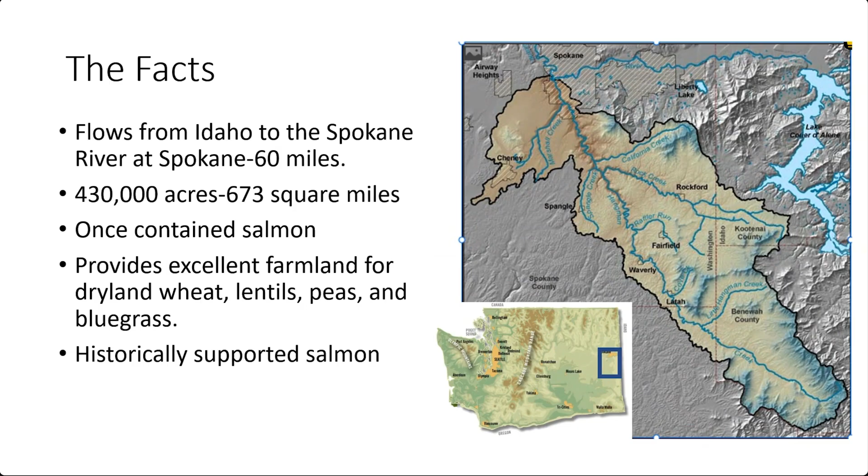You'll see this map again, I think, in another presentation. One big thing about the creek is its geology, and I think this really shapes a lot of what I'm about to talk about, and other presenters are talking about. Here in Spokane, you guys have driven by the Qualchan Golf Course and seen those Qualchan Bluffs, I guess I called them.

That's the really sandy soil that was deposited 10, 15,000 years ago by the Missoula floods. Relatively recent, and it's eroding. You can see this picture. I just canoed Hangman Creek recently and took this photo, and it's still eroding to this day, pretty rapidly.

Downstream of there, but it's to the south because Hangman Creek flows from south to north. And I should note that it ends up here in Spokane. People's Park is the mouth of Hangman Creek, right there near Sandifur Bridge.

So we also have this really cool canyon section, which is 200-foot basalt cliffs. It's about 11 miles long, and it's just unbelievable. It's a relatively untouched environment, and not only is it gorgeous, it's really exciting rafting or whitewater kayaking when the water is up. There's an entire presentation that can be done on the recreation in Hangman Creek, and I think whitewater rafting would be a good one.

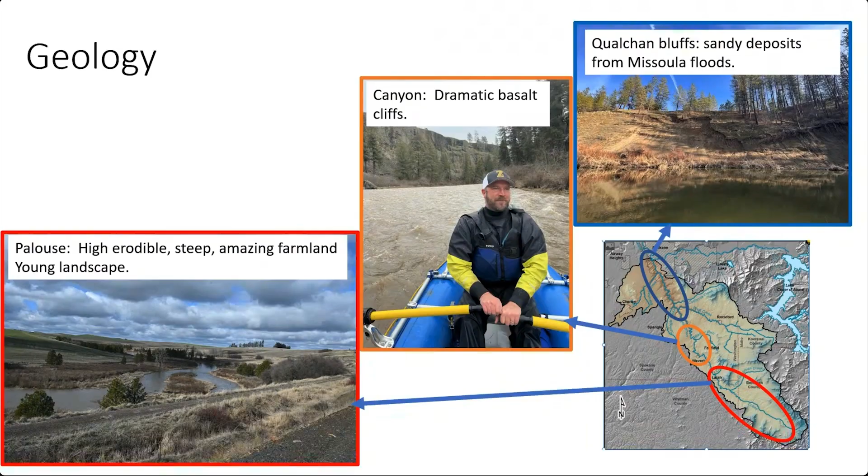And then south of there is the Palouse. It's this amazing farmland, but it's also highly erodible soil. It's relatively young - the Palouse was sort of blown in there by winds when the glaciers receded, and it's really steep because it is young. That highly erodible, very fine soil gets into our creek and is suspended for a long time, and that's what causes a lot of the pollution you'll see.

And a lot of this land use is a big contributor to pollution. Hangman Creek is one of the most polluted creeks in Washington state, if not the most polluted. And it's polluted with sediment, temperature, dissolved oxygen.

These are the kind of non-point source pollutants that aren't going to harm you as much. They're not toxics, but they do make it really hard for fish to live there. It's about meeting our designated uses, which I'll talk about in a minute. But it's just dirty, I think, is the way to think about it, and it's hard for salmon and trout to live in it.

What caused this, along with the geology and that really fine sediment, is what we've done to the creek. It's the straightening of the creek, which you can see in the upper left corner here, and the removal of vegetation along the creek - there's no riparian or streamside vegetation here. We'll talk about that more later in another presentation.

This has caused deeply incised channels, like you can see on the right. There's some riparian vegetation there, but there's no connection to the floodplain. So when that creek gets high, it's still just moving really fast, and that causes more erosion. It's like a positive feedback loop where more erosion causes more erosion, and it causes it to run faster, and more erosion happens.

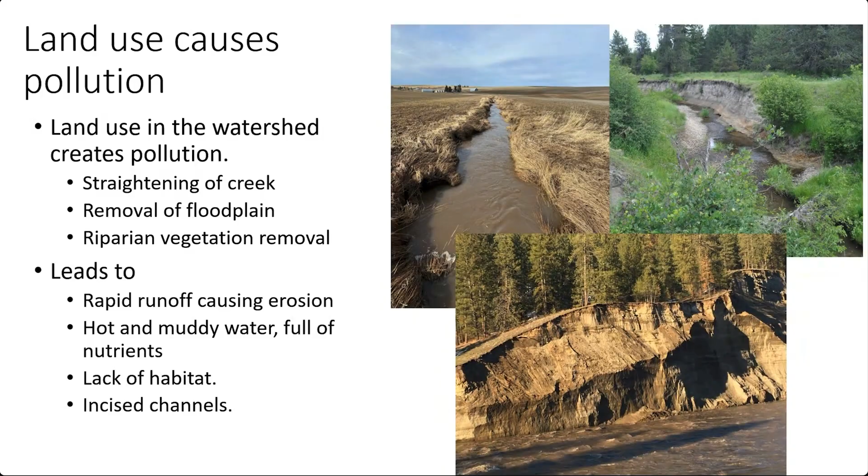The pollution impacts everyone. We call it designated uses - these are the things that legally you are required to protect by the Clean Water Act. This could be a whole other talk by Caitlin about what these are and how we protect them. But really what you need to know is trout and salmon need clear, clean, and cold water, and Hangman Creek does not have that. So it violates that designated use for fish rearing, spawning, and migration.

Sediment buries their food and their nests. Could you imagine fishing on this plume? This is the mouth of Hangman Creek looking downstream, sort of near People's Park. And you can't fish this really for trout, if there are any trout in it - I don't think there are.

So it impacts recreation, and these pollutants could potentially harm humans, especially if there's bacteria in the water. And aesthetics - it's ugly, I guess, is sort of how we view it. No one's told me they like the pretty muddy water of Hangman Creek.

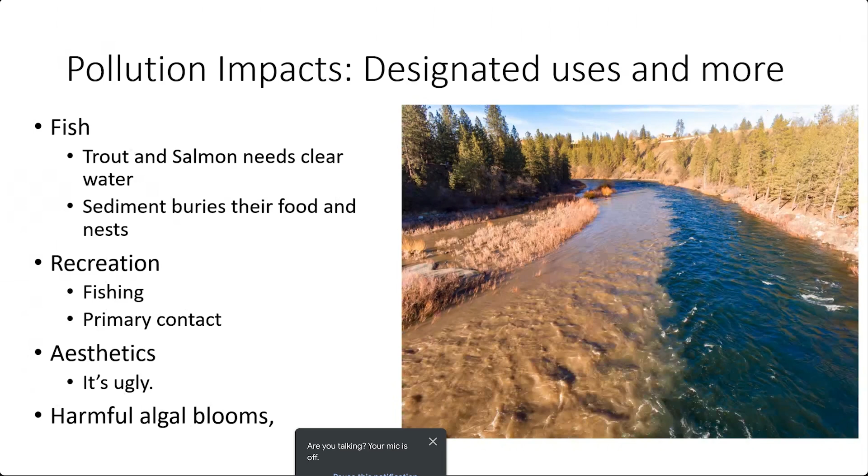But it also impacts other things. All these nutrients can go downstream and impact Long Lake or Lake Spokane, and cause harmful algae blooms or low dissolved oxygen that causes fish kills. So you sort of get this pollution in Hangman Creek, but it also affects the Spokane River and downstream in Lake Spokane.

Salmon were once in Hangman Creek. I did quite a bit of reading to prepare, including quotes from tribal elders. One book said Hangman Creek was muddy back in the 1890s or 1880s and probably didn't support salmon, but tribal elders all mentioned how important salmon were. There were 8 or 9 fishing camps along Hangman Creek, including in the town of Tekoa, and fish were an important part of the culture and food sources of the Coeur d'Alene tribe along the creek.

There currently is a reintroduction program by the Coeur d'Alene and Spokane tribes, but the Coeur d'Alene tribe is leading the one in Hangman Creek. They're releasing big adult fish in the creek and the Spokane River.

One of the locations is the Pilcher property at the South Hill Bluff, and in the headwaters as well. They're also releasing juveniles at 9 Mile Dam, hoping they will one day return to Grand Coulee or Chief Joseph Dam, where there's no fish passage. So they'll out-migrate through the dams, get spilled over, and one day return in 4 to 7 years, and they'll truck them back here to spawn.

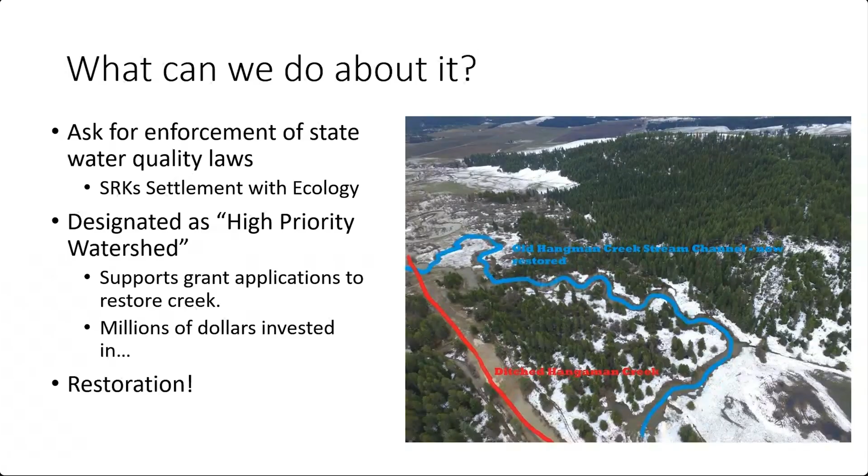So what does that lead to? Well, really it leads to restoration, because you've got to do the work on the ground and get it done. Restoration is really moving beyond just tree plantings, and that's what I want to highlight tonight, and what our speakers are going to highlight: floodplain restoration, shoring up banks that are eroding, and some other cool programs.

This is the Lands Council's Beaver Dam analog work. They're not speaking tonight, but I thought I'd highlight it because it's a really low cost way of restoring a floodplain. Hopefully we'll get them on soon to talk about their work in the basin.

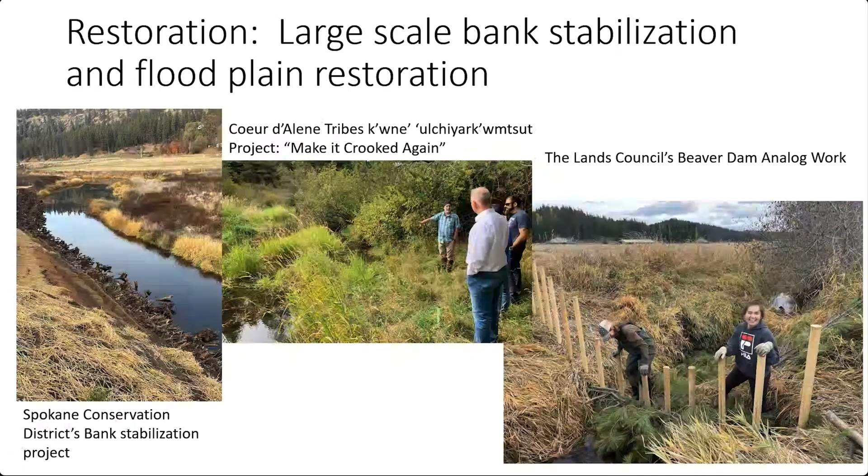The Coeur d'Alene tribe couldn't be here either, but they have a really neat project in the headwaters, translated as 'Make It Crooked Again.' They've taken an incised channel, filled it in, and let the floodplain restore itself, doing a lot of work along the way. And on the left is Dan's project, he'll talk about that in a little bit.

Tonight we're going to highlight two speakers. I wish I could get everybody to talk, but we only have so much time. We have Dan Ross of the Spokane Conservation District and Jim Tuck with Trout Unlimited.

Let me pull up Dan's bio. He's going to talk next, but he's a longtime employee of the Spokane Conservation District, 26 years, since 2000. He has 26 years of field experience working with SCD and is getting a lot of work done on the ground, which you'll probably get from his presentation. It's not just limited to Hangman Creek or restoration, but also fish barrier correction projects like culverts, and work in the Little Spokane River. So I think Dan is up next.

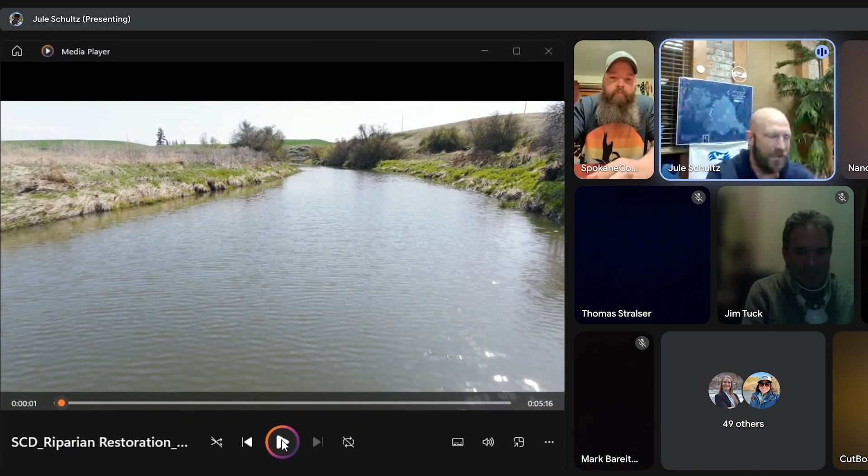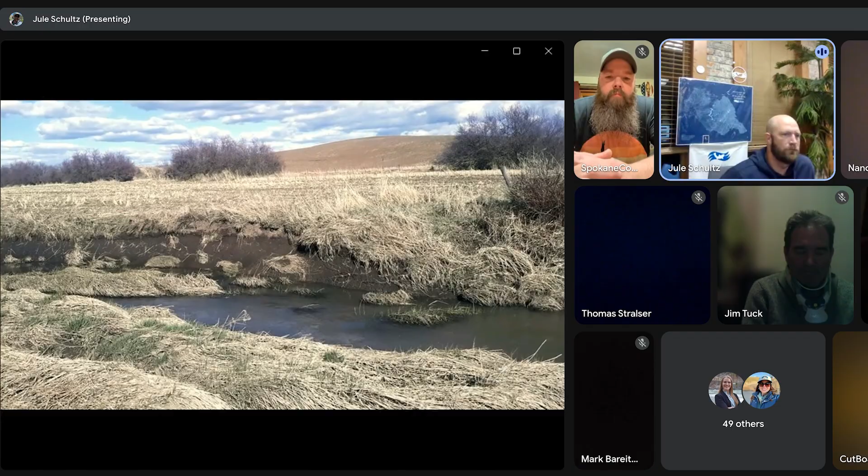Hangman Creek and its tributary, Little Hangman Creek, flow from Idaho's mountains to the Spokane River, supporting people, farms, and fish. Over the years, runoff, erosion, and the loss of streamside plants have raised water temperatures and harmed fish, while erosion has carved away valuable farmland. Today, partners see a future where healthy water and farmland go hand in hand. Landowners are working with Spokane Conservation District to voluntarily restore the creeks while keeping local farms thriving.

The history of Hangman Creek is such that it's been manipulated since the early 1900s. There's been a lot of manipulation of the channel, and when you do that to a stream, you're basically interrupting a geomorphic process that allows a stream to manage its own energy. When you straighten out a channel, it can't manage its own energy any longer, so it carries those velocities downstream, and those get exacerbated and start tearing banks apart. We've seen that all up and down the system.

As long as I can remember, this creek has been an issue of breaking out of its channel and making new channels, running and just making a mess of things.

In 2023, the Spokane Conservation District partnered with the Washington State Department of Ecology to launch the Hangman Creek Riparian Restoration and Conservation Program, providing financial incentives and hands-on support to help farmers voluntarily complete projects that improve water quality and protect creek banks. Partnering with generational grower John Heaton, they reshaped the once straightened Little Hangman Creek into natural bends to slow water and reduce erosion. They also planted hundreds of trees to stabilize the banks.

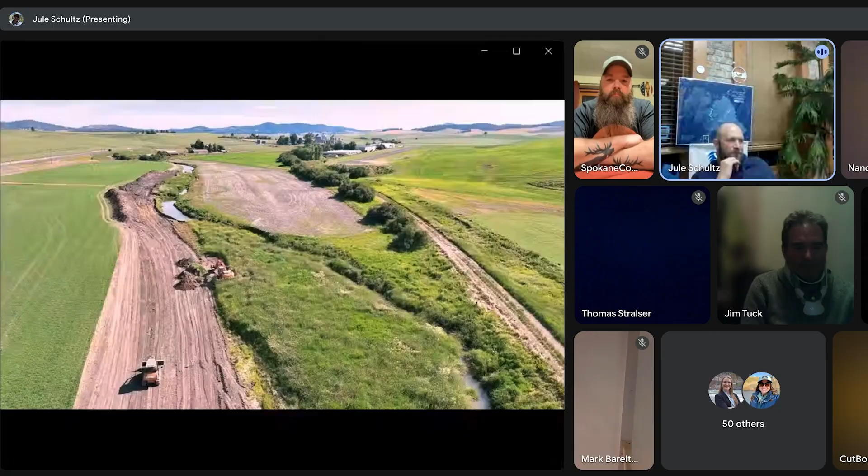Successes like this show how collaboration can help farmers navigate tough situations and regulations with limited resources. That's where the Conservation District comes in, serving as a bridge to connect farmers to the tools, funding, and expertise they need to solve complex problems.

I really view myself as an advocate for farmers. A lot of times they're saddled with regulatory authorities that come out and tell them they have to farm a different way or a certain way, and they don't have the resources or the knowledge or the ability to do that. That's where I see the Conservation District coming in as a partner with farmers, to give them the technical assistance and the resources to do the restoration work, and then also beat the bushes and find financial incentives that don't undercut their bottom line.

We're changing the creek banks here, which I think is important. We've had conservation programs for years way off to the sides, but not right on the main stem, and so I'm very excited about that. My neighbors at first were not real on board with it, a little bit. They're worried about regulations and stuff, but I have all the way on both sides of me now, guys have signed up. It's a very attractive program, and I think the right times are coming.

Trying to get these things done with limited resources, but we have the budget to do it. We have a plan. It's that old adage, how do you eat an elephant? And that's really what we're doing here, taking off bites where we can. You go walk around out here and you see that buffer width, and the grass is coming out competing with the weed species.

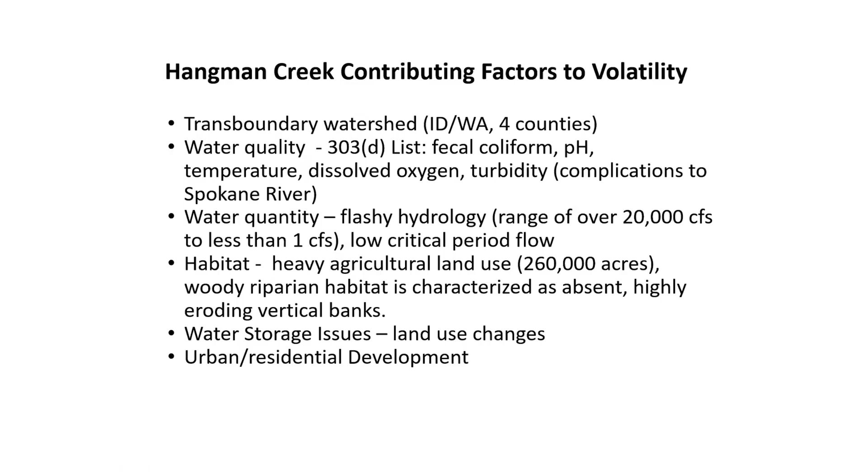Jule already gave a bunch of really good background information on Hangman Creek, so I'll probably skip through a few of these first slides, just breeze over them. I do have a lot of slides, and there are actually a lot of projects to highlight, and I don't want to skip over those too fast. But this is background information Jule already kind of shared. There are land use impacts, and primarily the work I've been involved in is stabilizing the vertical eroding banks. We do have an ag production department at the Spokane Conservation District, and they offer programs that promote conservation tillage and other agricultural practices that benefit and improve water quality. I'm not going to dig too deep into that right now. I'm mainly just going to be talking about the projects we've been involved in.

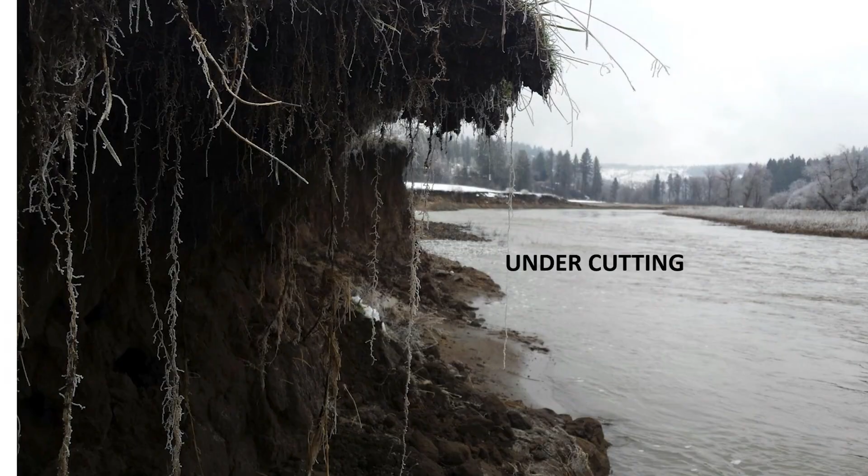One of the major causes of bank erosion in Hangman Creek, from what I've observed over 26 years, is not necessarily the large 100-year flood events. It's the moderate flood events where there's ice rafting associated. When that occurs, you've got ice rafting at a moderate flow event, and what that's doing is scouring and undercutting these banks, and then they start to collapse on themselves, and then of course rinse, repeat.

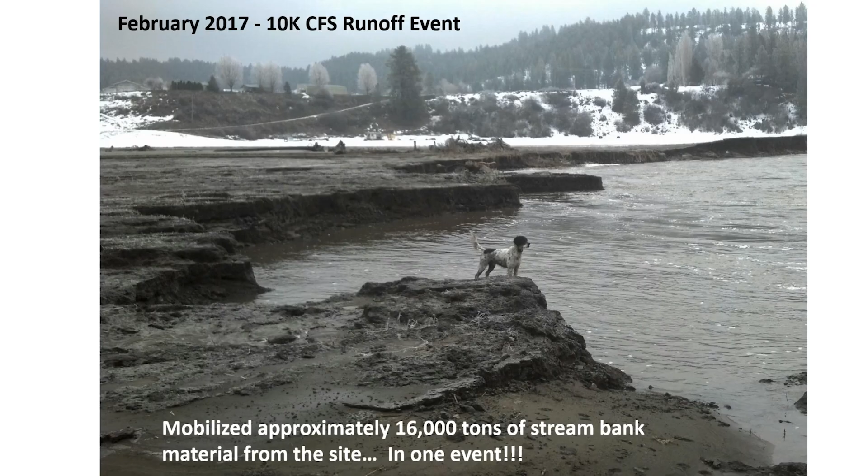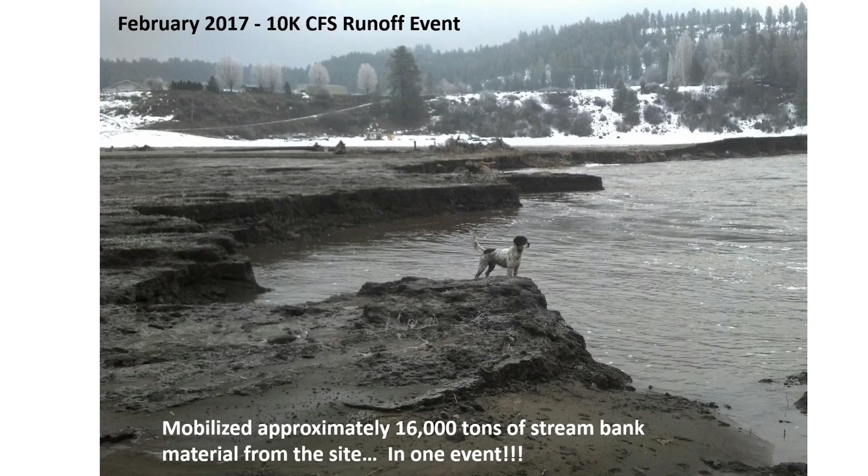This is an area in the River Mile 17 reach, which we started working in 2017 with some design work, actually beginning in 2016. Then in February of 2017, we had a 10,000 CFS runoff event with a lot of ice associated with it. I immediately, right after that event, called the design engineer because we had pre-project survey work in place, and we were able to quantify approximately 16,000 tons of stream bank material came from just this site alone in that one event.

Everybody's probably seen this picture, and Jule, you probably had this one in your slide too, just from a different angle. I was trying to mix it up, yeah. No, that's great. But this is what happens, and this is a combination of agricultural inputs and bank erosion.

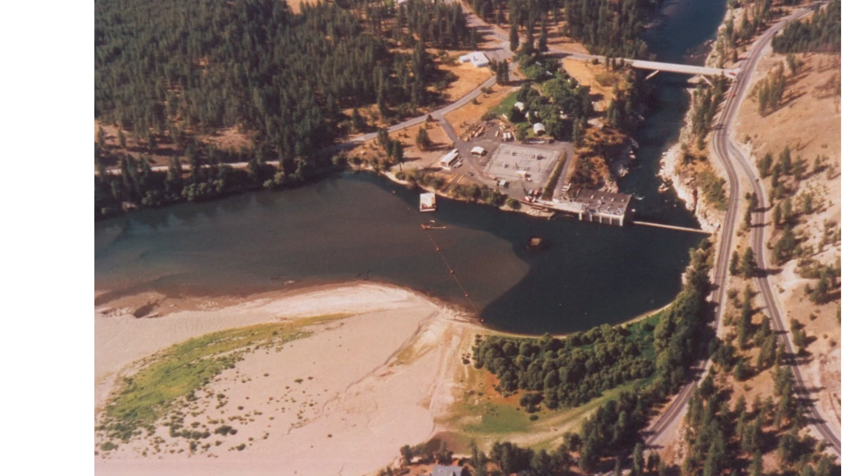A lot of that material ends up down behind 9 Mile Dam. This is a picture of that deposition and where all that's ending up.

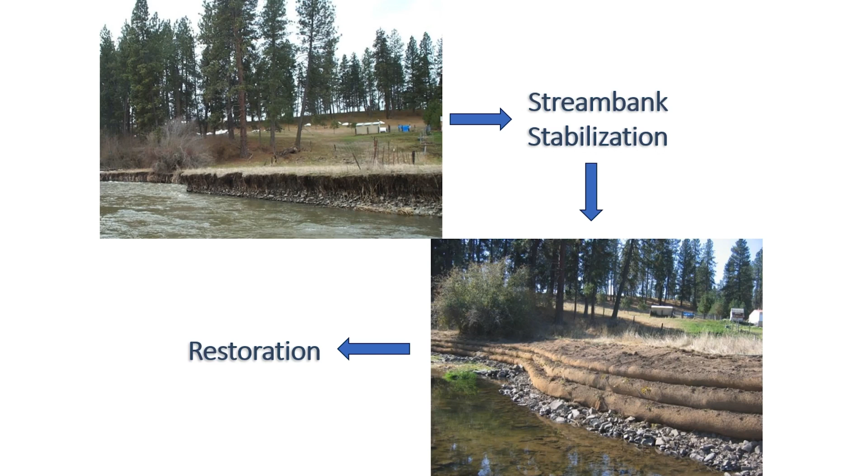When you have an undercut or actively eroding stream bank, you can't just go plant trees into it because it's not stable. They're just going to disappear on you, and they don't have any opportunity to get established. So you have to have that stabilization component before you do the restoration. I'll be talking about the methods we've been using for stabilization in Hangman Creek as we go along here.

Just to give you an idea on the process and timeline it takes to implement a project - of course projects are scaled differently and are site specific, but generally it can take up to 2.5 years from planning to implementation. Then after you do the dirt work, you've got a couple more years of repeatedly addressing and planting and getting plants established and doing weed control and things like that. So to get to a stable condition, it can be about a 3 to 5 year process.

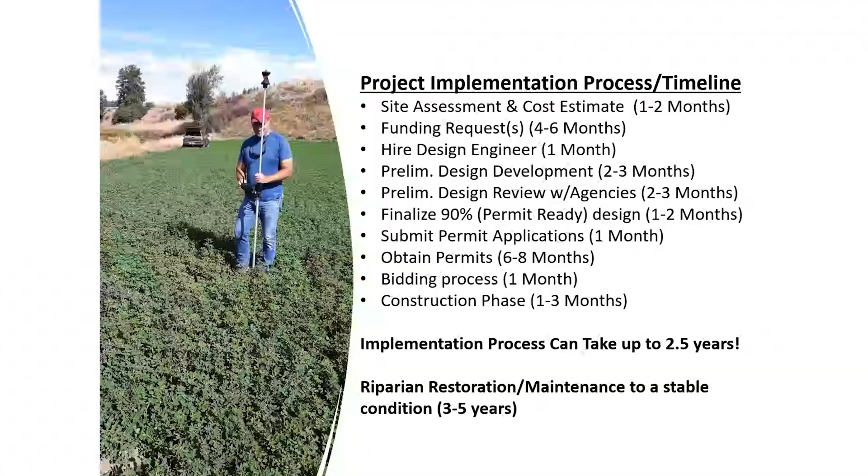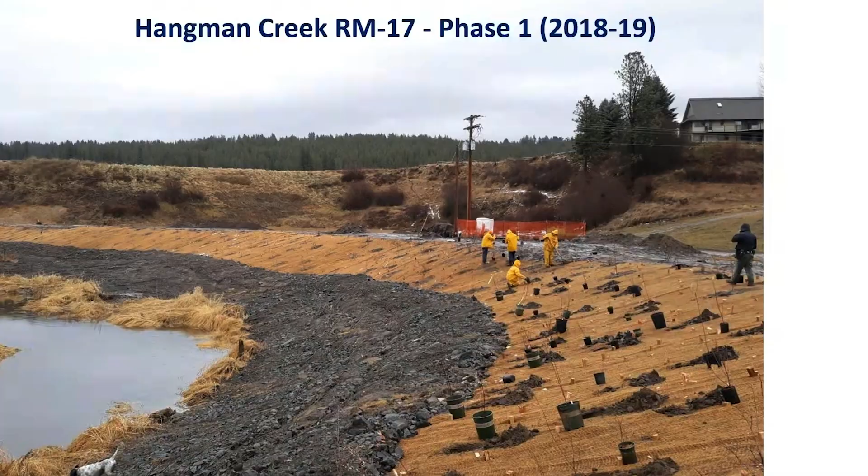This is that same site you saw a picture of with the erosion and the 10,000 CFS flood event. This is Hangman Creek River Mile 17 Phase 1, which we started in 2018 and it went through 2019. This was a vertical eroding bank, and the treatment method here was to re-slope the bank and do rock toe protection. That re-sloping gave us basically a planting medium, and you can see here there's a prison crew out there actually planting trees on that newly re-sloped bank. We also treated that bank with coconut erosion fabric.

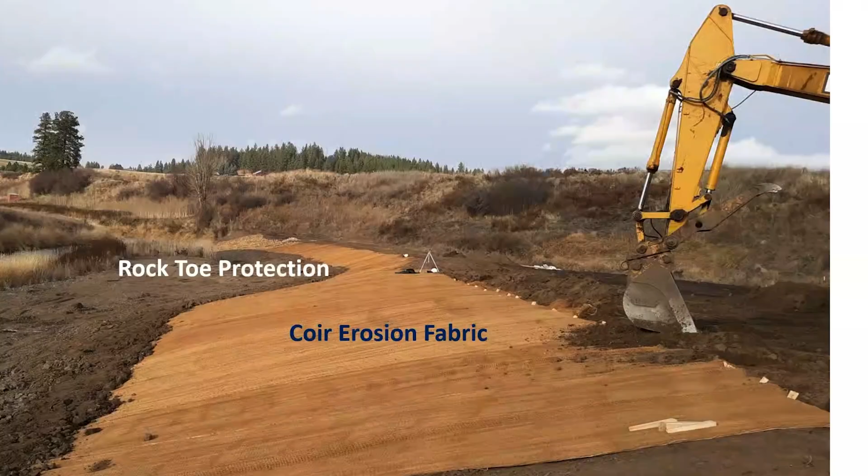This is another closer example of that process. The rock toe protection and the coir erosion fabric are keyed in at the bottom and top of the slope, and then it gets a grid of wedge stakes inserted onto that fabric.

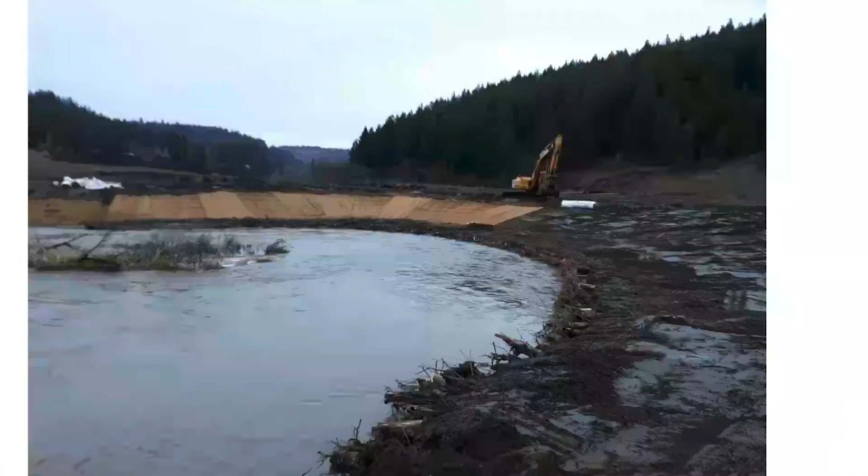This is a view from the other end of that woody revetment bank. Once the wood was in place, we set coconut erosion fabric and then went ahead and did the restoration planting.

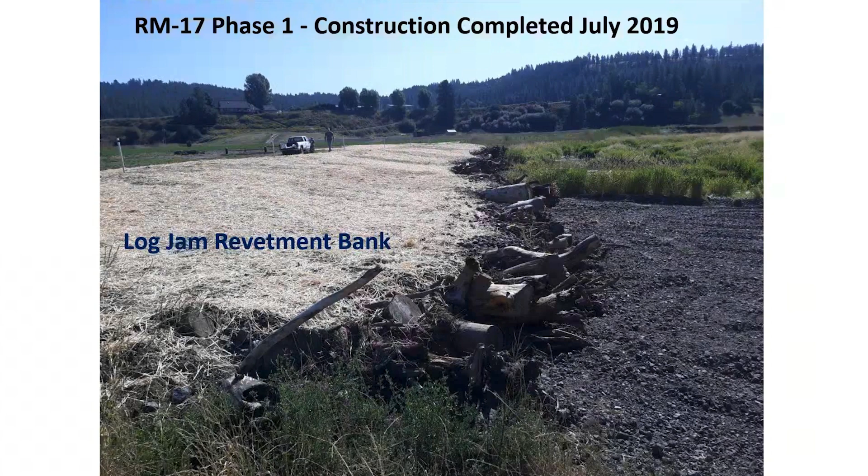The construction in River Mile 17 Phase 1 was completed in July of 2019. This particular bank was treated with a log jam revetment, a lot of wood at the toe just to prevent that undercutting action. This was a combination of 2 landowners for Phase 1.

A couple of years later, some neighbors just downstream of River Mile 17 Phase 1 - immediately after we did Phase 1, they contacted us and said they were interested in doing something as well. So we started the process in 2019, then the planning and design process, and began construction in 2022.

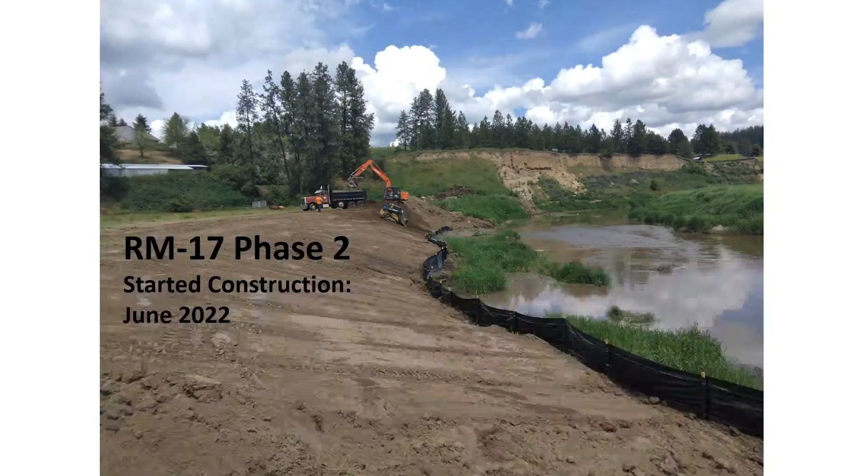This particular site had two different landowners and three stream bank sections with various treatment methods. Right here you're looking at basically a large woody debris toe with a composite of rock and woody debris, with vegetation planted in during the construction process. Then when we were all done, we went in and planted more native trees and shrubs.

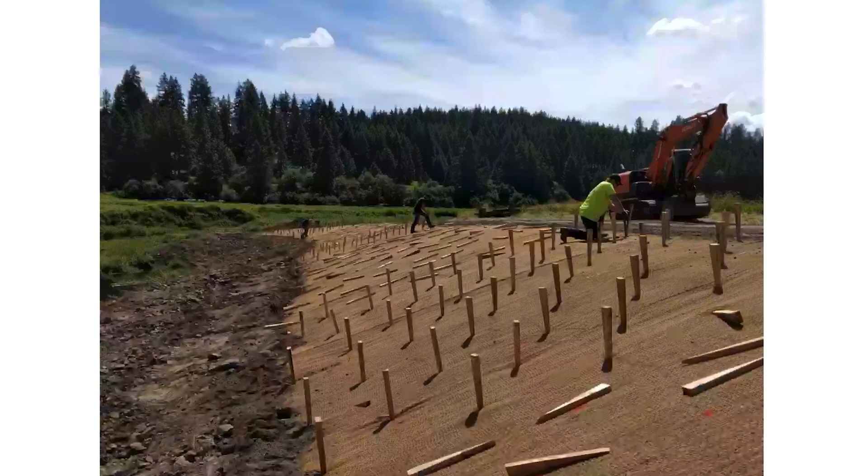This is an example of that wedge stake gridding method I was talking about earlier on a reslope bank with a rock toe and coconut erosion fabric. Pounding those stakes is really labor intensive and takes a lot of effort.

So Dan, you probably got like about 5 more minutes.

All right, we're going to cruise fast because I want to get to the last projects we did at the end of the season. Go ahead and cruise on through here.

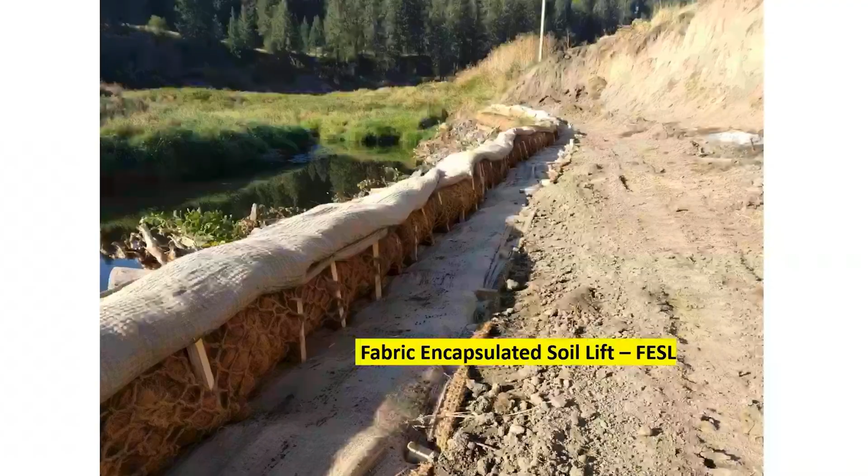That's a fabric encapsulated soil lift. That's a different method too. So this is...

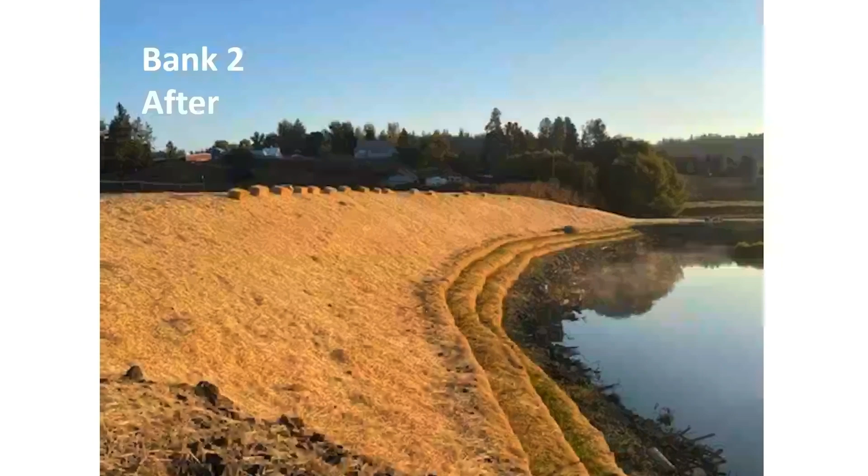Wow, I'll go back to that - before and after. Just keep cruising through these if you want, but they are a really stark contrast. Neat.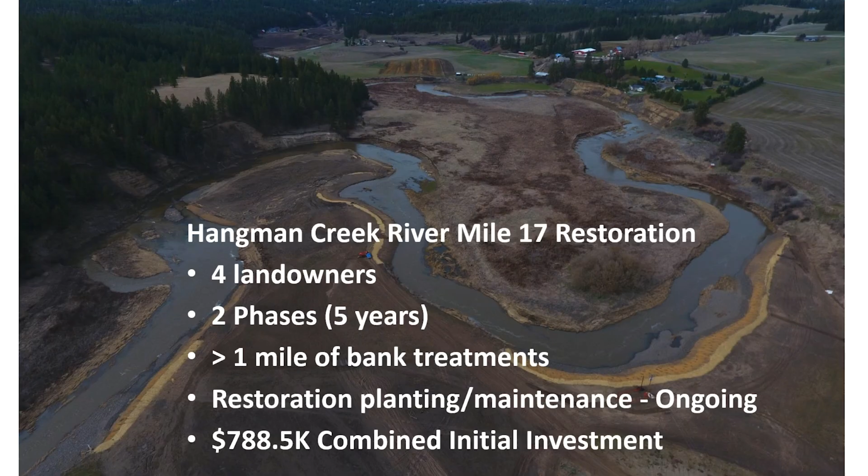So go ahead and go. Little Hangman Creek was done in 2023. This was in that 5-minute video that was shown earlier. John Heaton was a landowner, farmer out in the area that agreed to participate in this project. The design approach to this one was to create a 100-foot wide flood corridor with a 35-foot wide floodplain bench and a low flow channel.

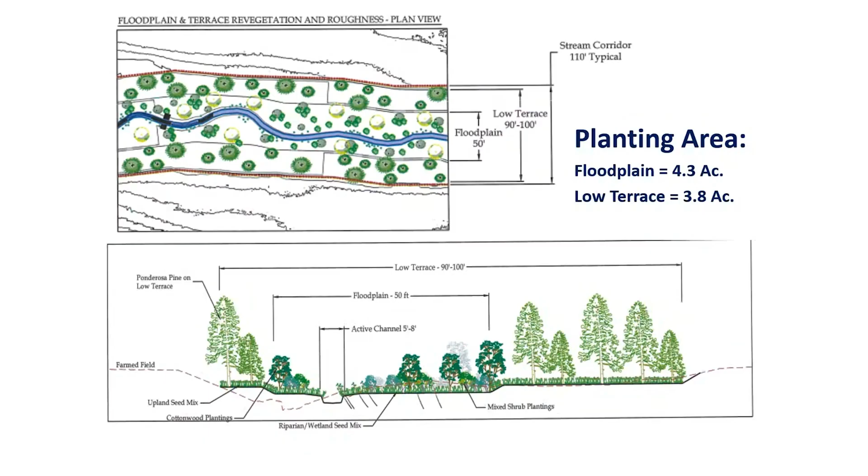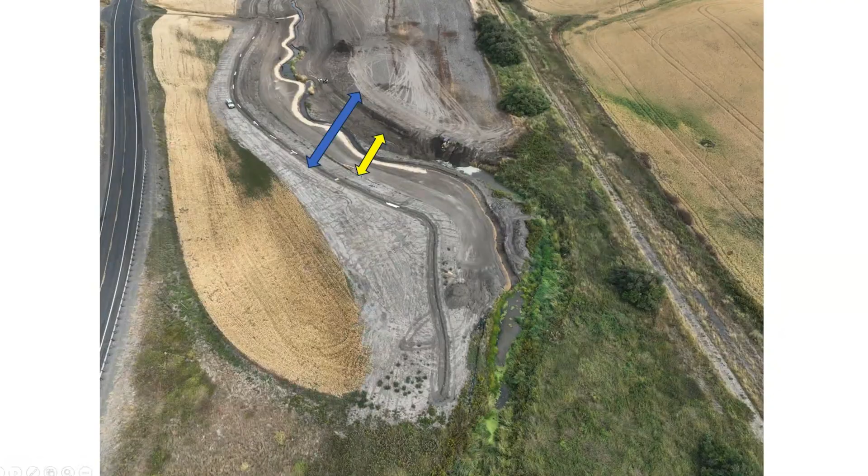Wow. You can see that blue line is the 100-foot wide width, and the yellow line there is the 35-foot floodplain bench. So we are reestablishing floodplain at this site.

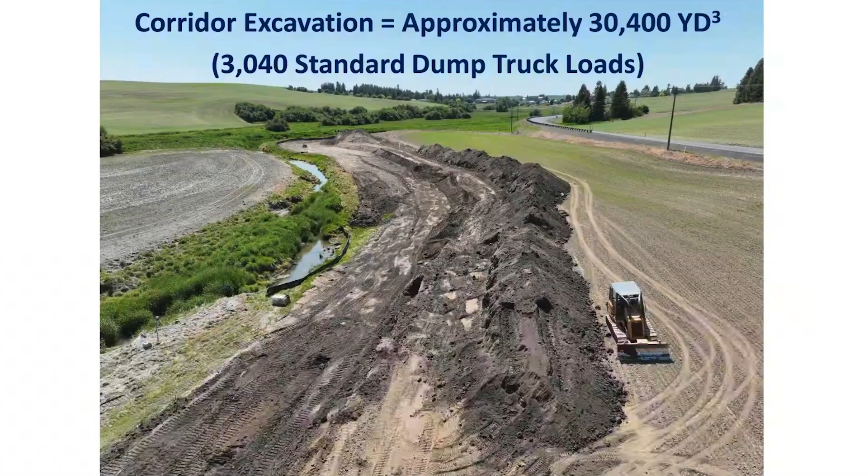This site we moved - go ahead next - about 30,400 cubic yards of material for this project site. That's equivalent to about 3,000 standard dump truck loads. So a lot of dirt moving on this one.

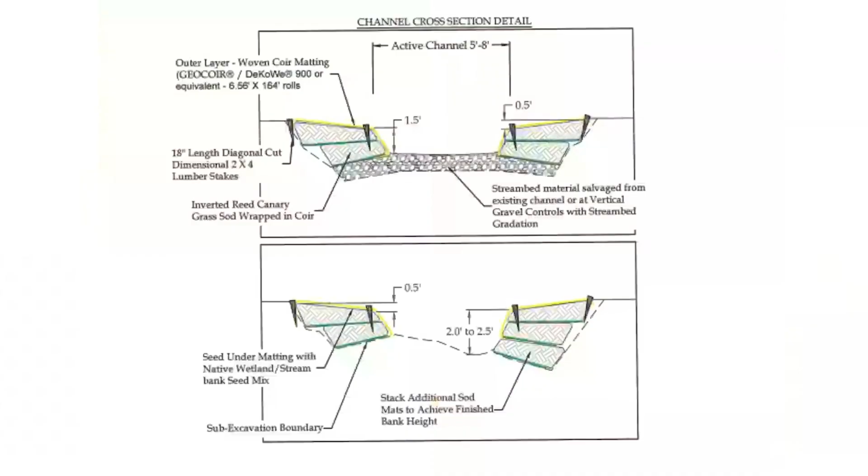It included channel reestablishment and meanders. Cruise on through, Jewel. That was just depicting how we did the bank construction. This is just post-construction - it's had a couple years to reestablish vegetation.

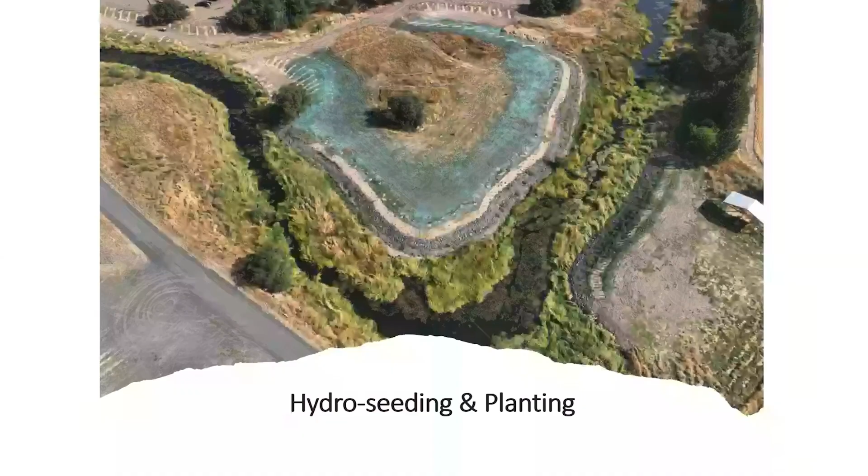So this is the other one that we completed. I don't know how that slide got off. Go ahead and go back one, Jewel. So this is... forward one. There we go.

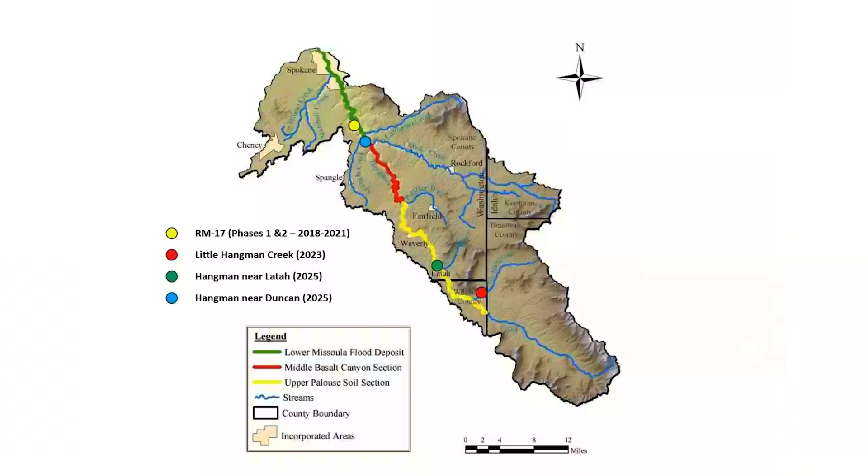So this is another project that was completed just last year, Hangman Creek near Duncan, which is just downstream of the Rock Creek confluence. Go ahead and go forward. I don't know how that slide got there, but go ahead and go forward again.

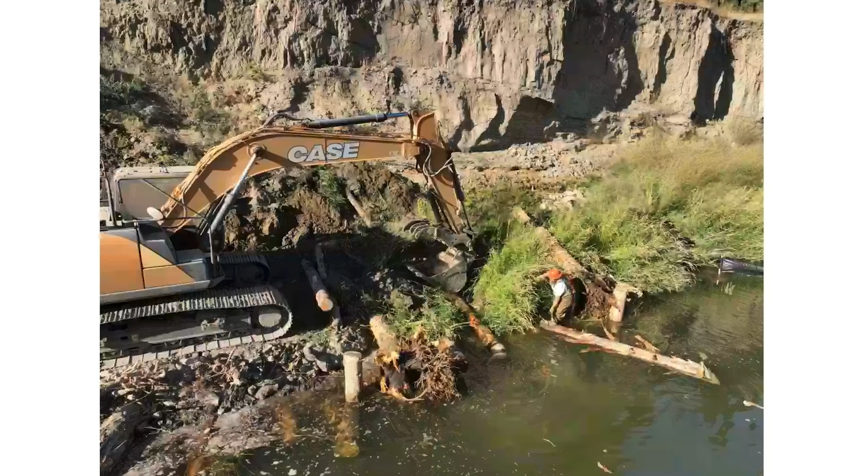This is placing of the woody debris and starting the work. That's me down there in the water.

This is just post-construction. The treatment method was a composite wood rock toe protection with fabric encapsulated soil lifts, and then we revegetated with natives. This one will have ongoing maintenance and replanting to get everything established.

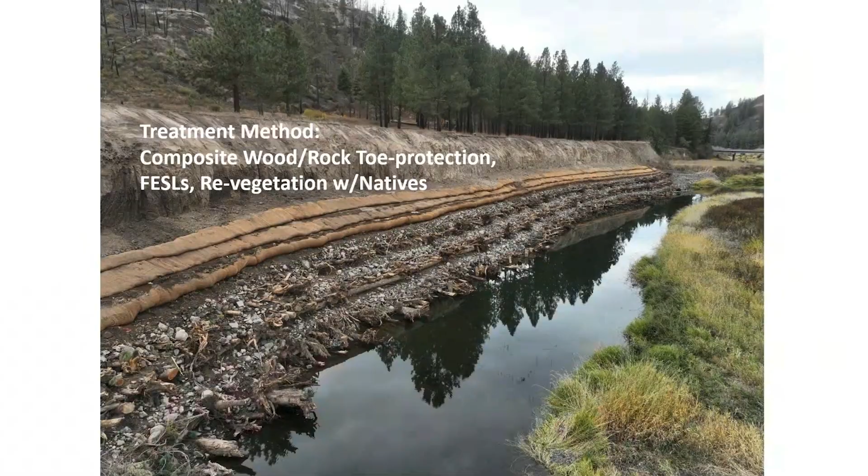Of course, we also plant a lot of willows and bare root stock during construction, and every one of those coconut fiber soil lifts on the top of this bank has a number of plants placed in between them too.

Go ahead and go forward. And then of course we did the restoration. So that's the last one right there.

Next one. Yeah, if there's any questions about this or anybody wants to see this presentation or wants a copy of it, please feel free to contact me.

Yeah, that's an incredible amount of work, Dan. Thank you so much. We can take questions at the end about, I mean, there's a lot of stuff in there. So if you want to hang around a little later, hopefully Dan can stick around and answer questions. If not, you know where to find him, right? At the Conservation District.

Great. Thank you, Dan. So next is Jim Tuck. He's going to share his own presentation, but if it can't work, I'll share it for him. Jim is a longtime friend of the Riverkeeper and educator from St. George's School who recently took a job with Trout Unlimited National, who's doing a really cool project on Hangman Creek that is more floodplain restoration. He'll get into the specifics of it.

Yeah, go take it away, Jim. You got it. Okay. Hey, Dan, that was incredible. With that last picture, there was a bumblebee in the photo. Were you aware of that? Yes, I was. That is an incredible GoPro shot, just by chance. I had a GoPro going and it snapped a shot of a bumblebee. I couldn't do that again if I tried.

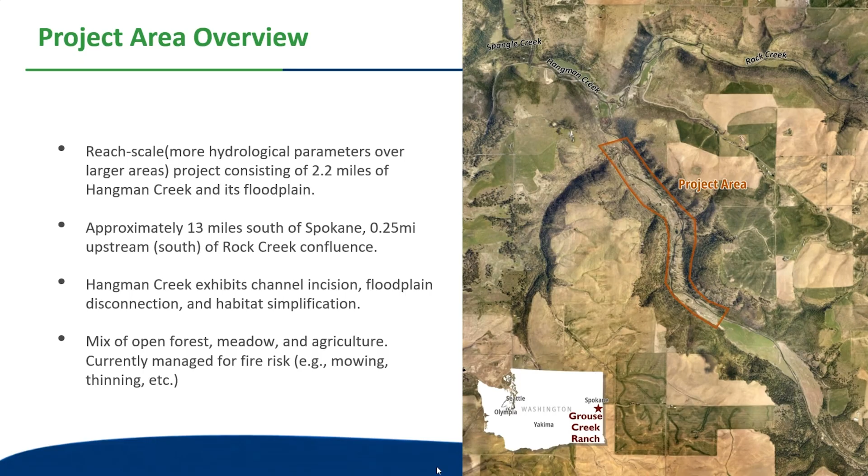So I'll give you just kind of a background. Back in 2012, that's when Spokane Falls Trout Unlimited first met the landowner, and since that time has developed a long-standing relationship. In particular, I'll call him out, Harvey Morrison. He's been basically the kingpin for this Grouse Creek Ranch project to get to where it is today. Then just 4 years ago, Harvey and others approached the landowner about the feasibility of a large floodplain project on the property. From there, a letter of understanding was developed, a request for proposal for project engineering services. We hired the engineering services from Interfluve.

And then in 2024, Interfluve did their initial field research survey, which then informed what's called a reach assessment report, which was a very comprehensive report that ultimately is informing what we're doing today as far as restoration strategies. Then just this last fall, we completed 3 additional surveys, including a wetland delineation survey, topographical survey, and a cultural survey. And we're working towards a 60% design as we speak right now.

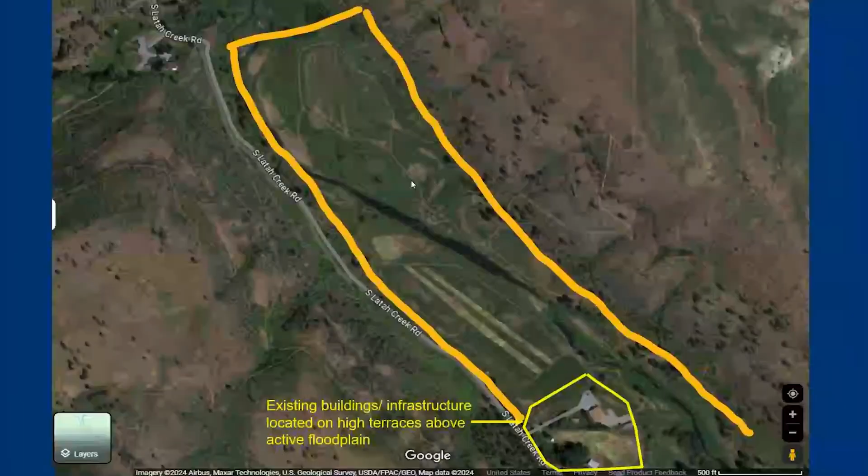Okay, let's see if we can make this thing move. There we go. Oops, it's a little touchy here, folks.

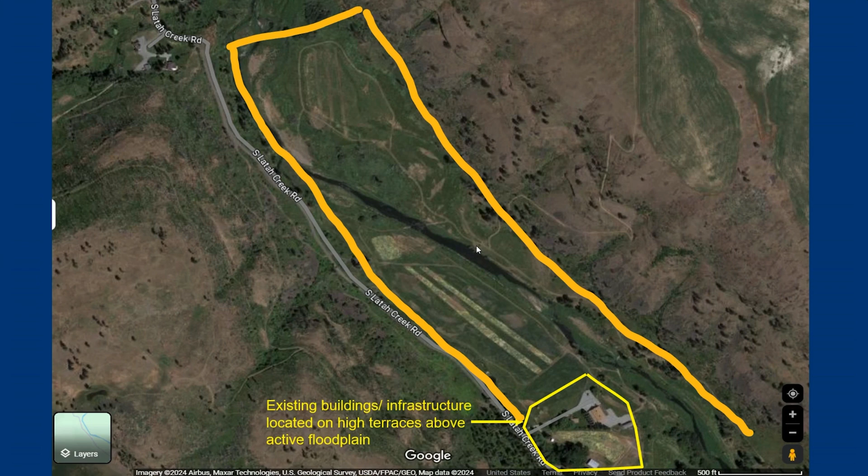This is the north end of the property. You can see some of the infrastructure, the buildings there. The project is 2.2 miles of creek length.

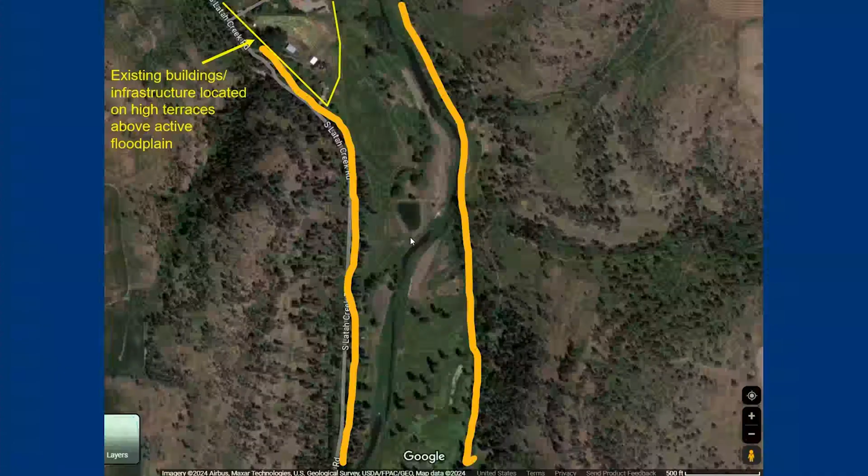This is the middle section, and as you can see, there's a pond here. The landowner wants that pond left in place in case of fire issues. They had to use it, I believe, in 2017. Some choppers came in and dipped buckets in there and actually saved a lot of the property infrastructure because of that pond right there.

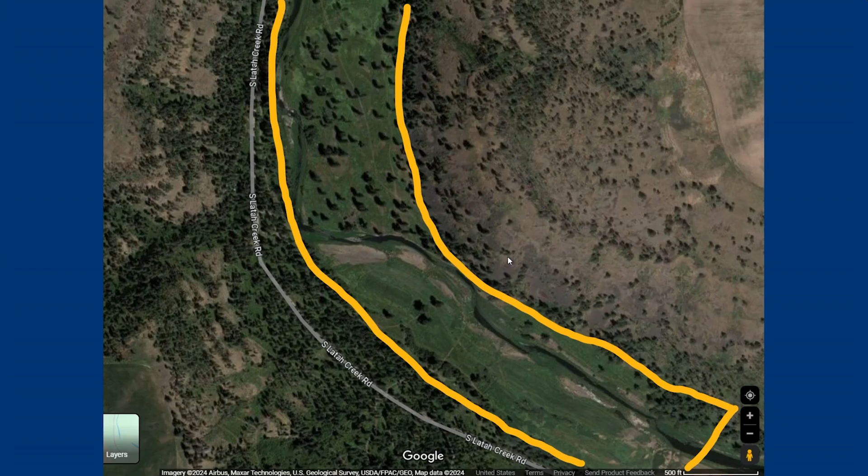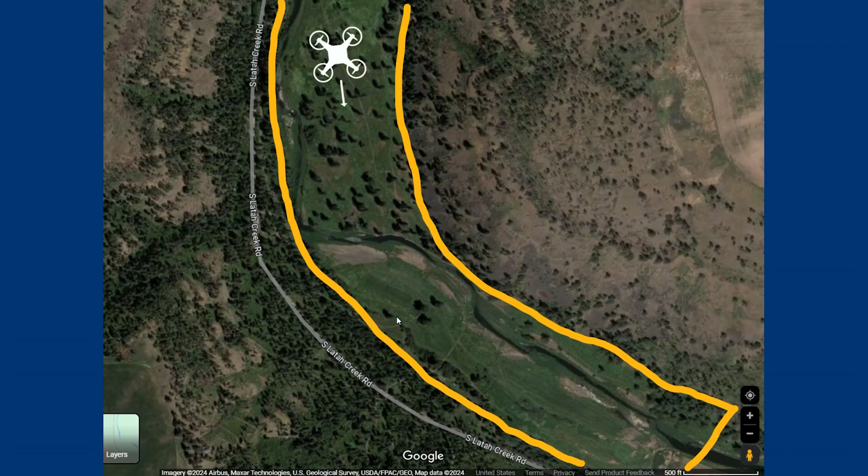And this is the southern end, and this is where we're going to be doing the first phase of the restoration work at Grouse Creek Ranch. We're going to show you this little drone icon here. There's brief footage I'm going to show you that goes from the north end of the property towards the south end.

And we'll see if I can make this baby go. You kind of get an idea where the project area is going to be.

It's going to include all of this part of Hangman Creek. This floodplain right here where the cursor is, we're going to reconnect that, punch in some side channels, do essentially kind of what Dan was talking about with all the great work they're doing. I'll show you some pictures of the design as it is now.

Oops, we already saw that. Okay, the big goal is we want this thing shovel ready by 2028.

It's very confusing with the phases. We call this phase 3 because it's the third phase of the 3 that are picked apart in this 2.2 miles. But I call it phase 1. So sorry for all the mix up here.

But anyway, shovel ready by 2028. Then additional design completed for phases 1 and 2, hopefully by the end of 2028 as well. Then full on construction from 28 and hopefully completed by 2029. It's a pretty big goal to have that all taken care of within 3 years. We'll see, but that's the plan.

Other goals are the reconnection of the floodplain, as I mentioned, creating side channels, all in efforts to slow those big velocities, those big flow events down, create more in-stream habitat, and ultimately down the road a long ways, creating habitat for returning salmon and trout.

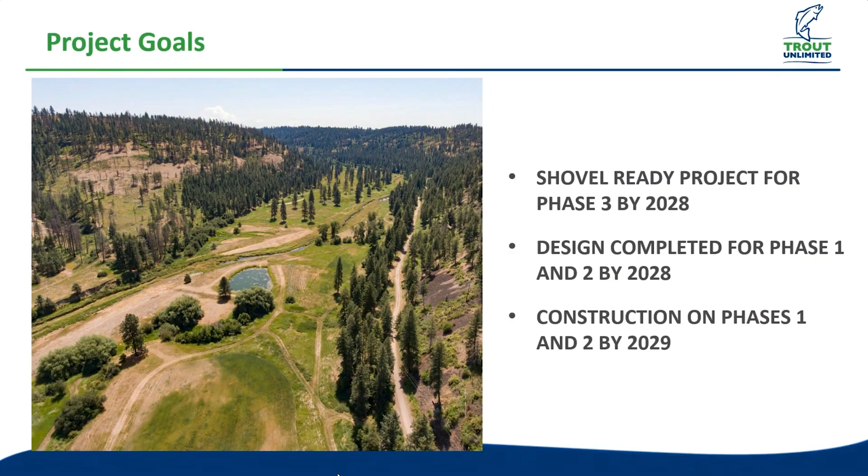On the backside, there's going to be some plants, riparian plantings put in there as well. The whole goal here is to raise the bankful elevation of the creek so that it spills into the floodplain, reconnects the floodplain, and then accesses these side channels. So it's pretty cool, I'm looking forward to seeing some things from this.

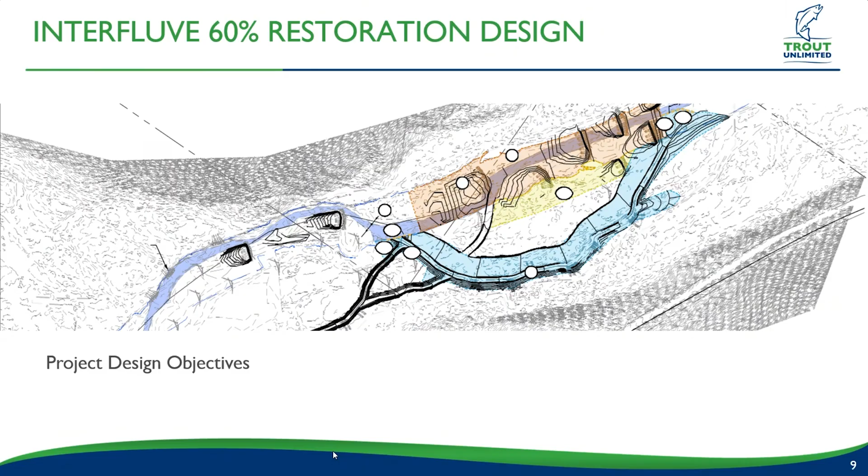In the near future. Come on, advance here. Oh, goodness. Can't get that. Oh, boop, boop, boop. There we go.

Okay, so the basis for design. How am I doing on time, Jewel? Great. Yeah, you have about 10 minutes.

Okay, I'm flying because I want to make sure people have time for questions. So this basis for design came after the reach assessment report, and this informed all the strategies that we're going to employ at that southern end.

So large wood installations are going to happen, low-tech woody installations, things of that nature, to all work towards a more complex habitat as well.

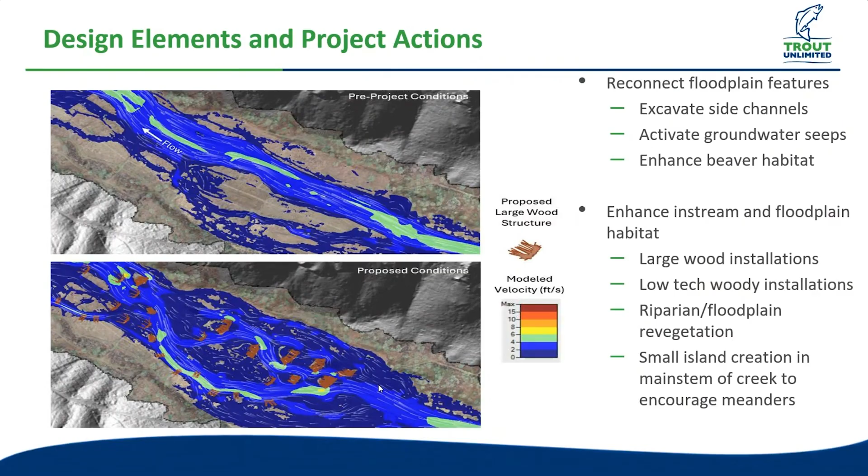And then some more from that basis of design. Again, the top is the existing conditions. This is all hydrological 2D imaging that put this together. After we do those strategies and add those features, you can see the meanders, those little islands that are going to create in that modeling, and how the side channels are reconnected here and further downstream. It'll all end up being, and this is all done with LiDAR from 2023.

So all of it should work to reduce, mitigate some flood hazard risks that's going on in the creek currently, as well as deposit sediment as that sediment is coming downstream off the Palouse.

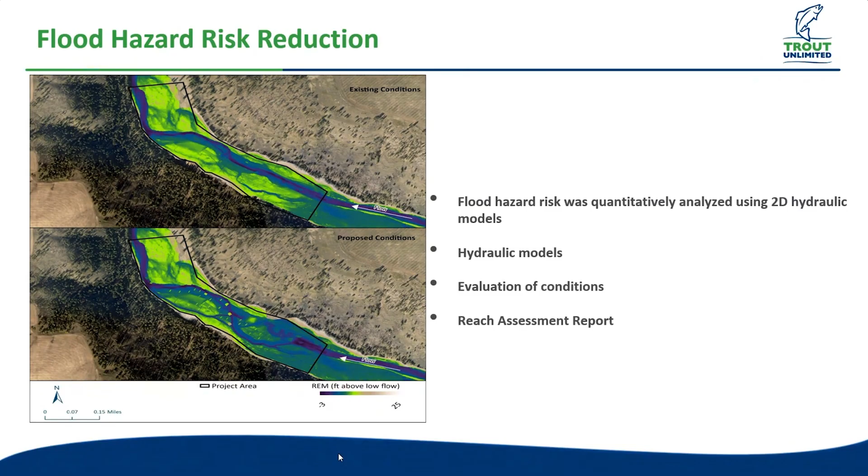What I want to point out is that this project is going to require a lot of permitting with state and federal agencies, and is consistent with the local watershed plans that are in place today.

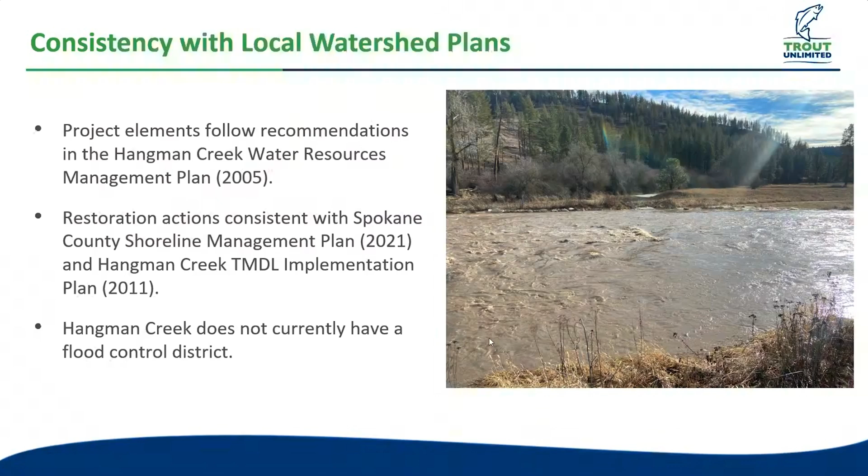The project relevance has already been hit upon. Hangman Creek used to be a salmon-bearing stream, and the Spokane Tribe of Indians and the Coeur d'Alene Tribe of Indians relied upon the salmon in those, and other not just anadromous trout and whitefish that were in the creek. This project will lead to improved habitat for returning fish. It supports the reintroduction efforts of the tribes.

And Hangman Creek is a key tributary. If you think about it, it's only one of two tribs in the Spokane River and one of only two points of entry for salmon into Idaho. So it's real critical that we continue to work on restoring this creek.

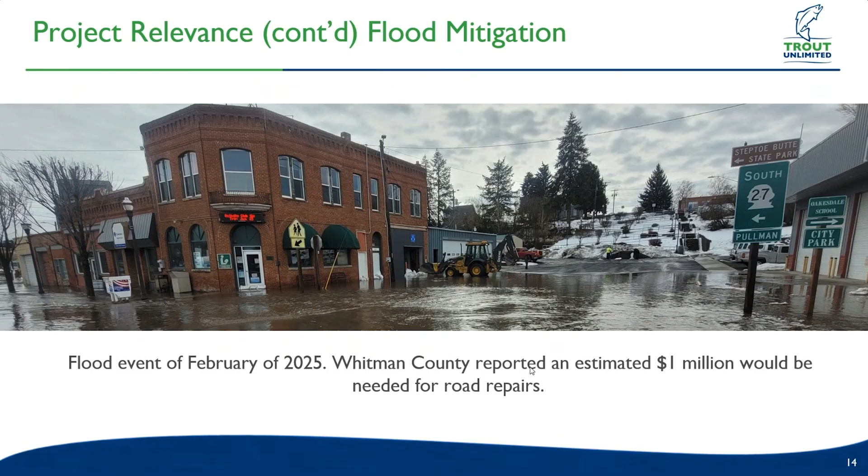Project relevance continued. Flood mitigation, this was from last year, and Whitman County reported an estimated about $1 million was necessary for needed road repairs.

I hate to bore you with this next picture, you've seen this three times now, but I've got it also. The idea here is Grouse Creek Ranch is going to work towards improved sediment impacts to downstream communities and water quality metrics. It's a large floodplain restoration project, one of the larger ones that's been put together, and it's going to hopefully be a demonstration for future projects in the watershed.

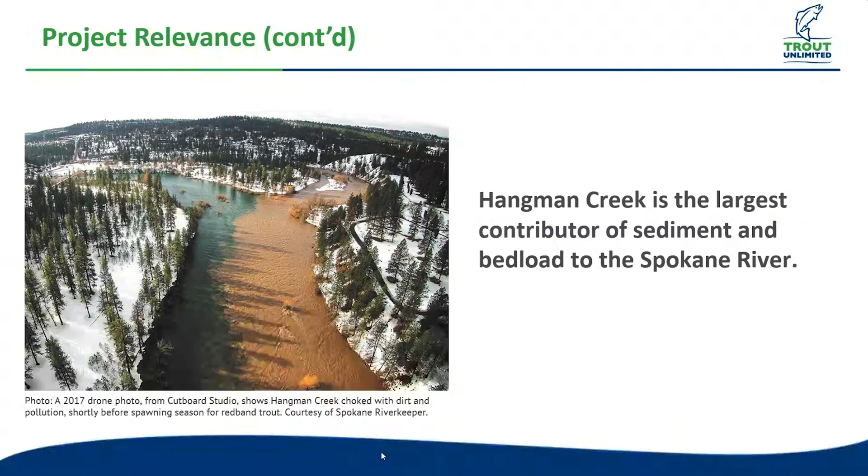And then our partners include the Spokane Salmon Restoration Collaborative, Inland Northwest Land Conservancy, and the tribes.

The scope of the project is pretty enormous, and it all hinged on that reach assessment report, which included that 2D hydraulic modeling, which forecasted the restoration opportunities that we have identified in our planning to put into place. Along with it, as I already mentioned, we have partnerships and agencies that we're coordinating with.

And one I need to call out right now because they've been really supportive and helpful, and they've funded most of the work, is the Washington Department of Ecology.

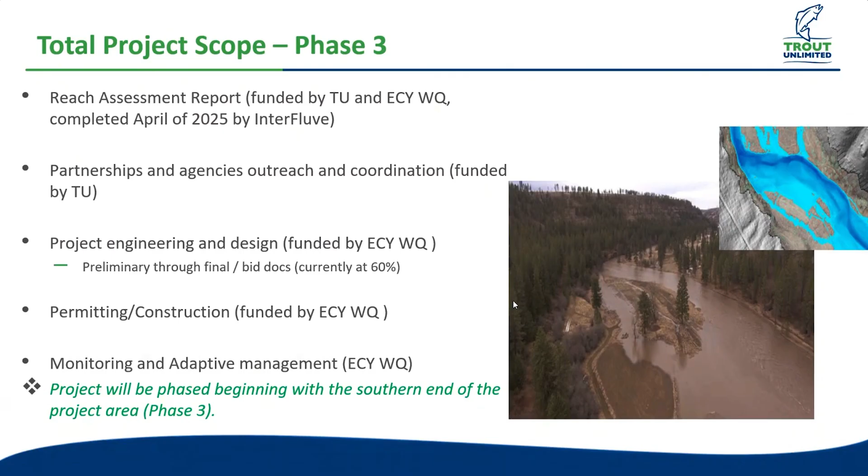This picture here, again, was a drone still picture taken of that southern end of the property. And you can see again how that water had spread out and is accessing the side channels here and the floodplain.

Some milestones real quick. Back in April of 2025, we got the reach assessment report finalized. I presented that report at the Spokane River Forum. We had a 30% design walkthrough that was completed in fall of 2025. The goal is to get up to 100% design by this summer, and then start working on the permitting process.

As Dan pointed out, projects like these take a very long time. We're probably looking at least two more years before any construction is actually happening.

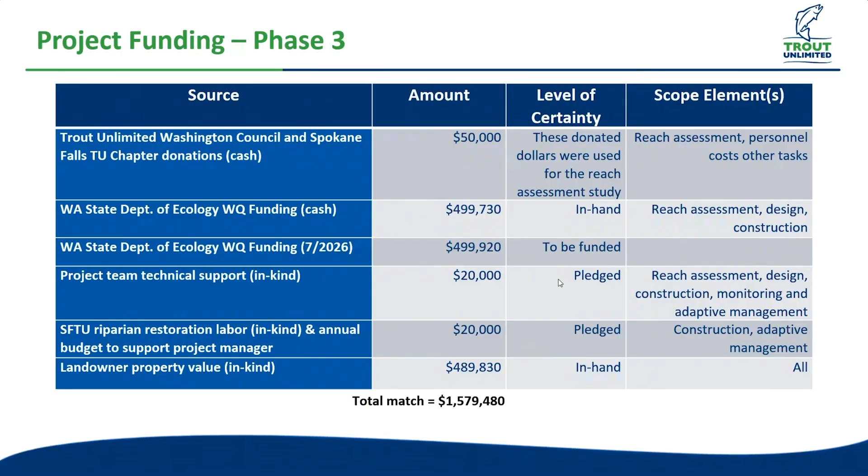And then funding thus far, most of it's come from the Department of Ecology. We've had some in-kind match dollars as well from the Spokane Falls Trout Unlimited. And I'm working towards securing more funding. Money makes this thing happen, and it's not easy to come up with funds.